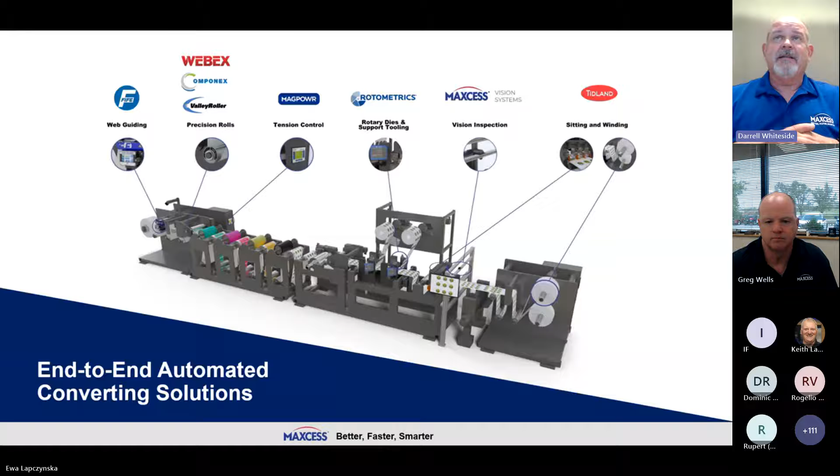So we're also continuing to invest in Industry 4.0 solutions. Well, what is Industry 4.0? Industry 4.0 is the Internet of Things, and it's having the ability to tie all of your different processes together, to collect data and to control those things centrally, since they are all tied together by the web. When I say web, I mean the actual web that you're running your process on. What this gives you is the ability to increase your productivity by being able to examine data from all of these different points and actually controlling them together.

It also eliminates human error, and it increases the quality and speed of your changeovers, because as we all know, if the web isn't moving, if your machine's not running, you're not making money. So Maxcess is dedicated to investing in this and continuing to expand our offerings that allow you to tie all of these product lines together. So in the end, our goal at Maxcess is to help you run better, faster, and smarter.

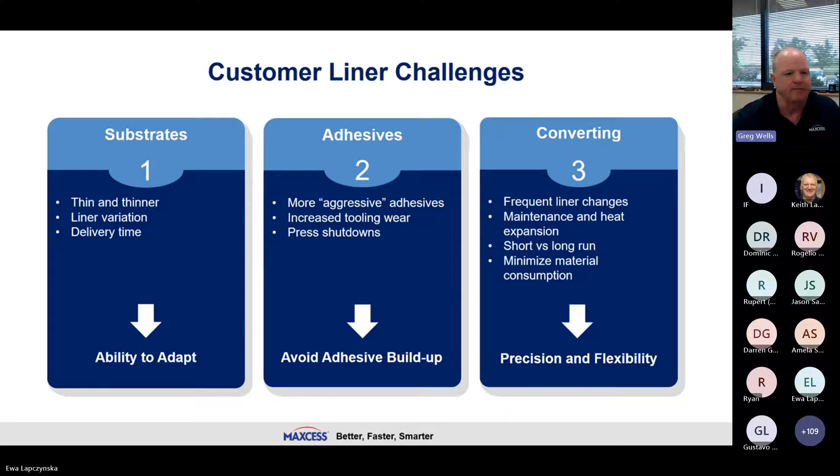The customer liner challenges today. So as we all know, the liners are getting thinner, the face stocks are getting thinner. We've been seeing a lot of variations in liners, and being able to adapt to these changes is very important. We offer adjustable anvils so that you can now change your clearance as the liners are changing. And with these thinner liners and thinner face stocks, the adhesives are changing. They need to be more aggressive because there's a thinner coat weight on them, on the thinner faces. So because of that, they're more aggressive.

And so you need to have a non-stick coating like our RotoRepel on the blades so that you don't have this adhesive buildup. This adhesive buildup will give you downtime while you're cleaning it off, but with RotoRepel non-stick coatings on the die, it makes it easy if it even sticks to the die. And converting this product then and being flexible to have these different products that we offer to mitigate these issues is very important, especially as you start to run thinner liners. Keeping the heat mitigation down as much as you can is very important. Next slide, please.

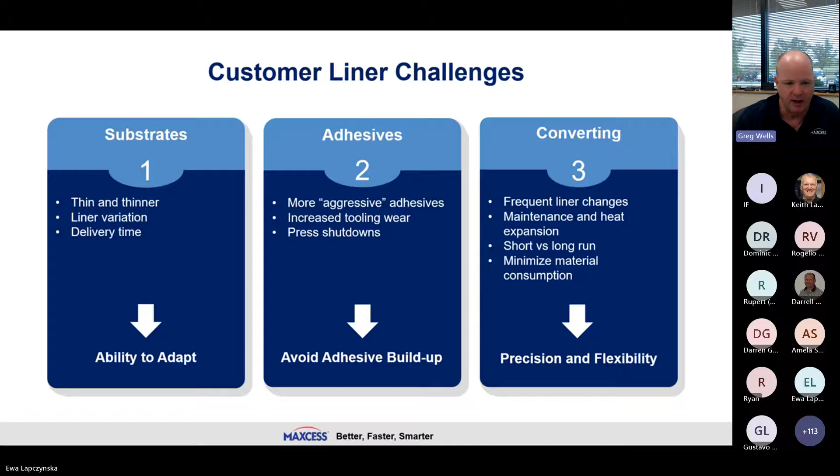The pressure that is being applied to these, making sure that you monitor and keep the pressure where it needs to be accurately. And one of my pet peeves is friction and temperature, making sure everything's lubricated and kept clean. Next slide.

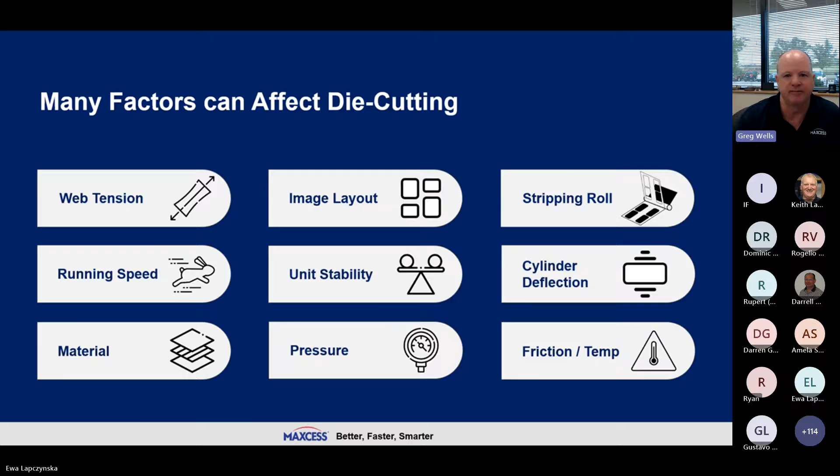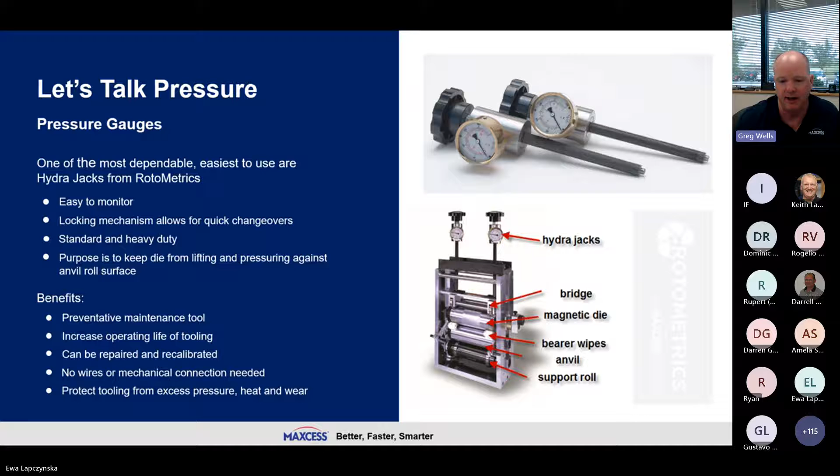So it's a great tool for just preventive maintenance to see what's going on. We can recalibrate them, send them back out. In fact, we recommend every couple of years to have them recalibrated. So it's a great tool to have, and I highly recommend using them. Next slide.

So with the Hydra Jacks, your cutting depth is very important. The accuracy on that cut depth is very important. When you're not cutting adequately, you could be cutting too deep, and then you can have delamination if it's a paper liner, or if it's a polyester liner, it may want to snap on you whenever the labels are being applied. So keeping the adequate pressure on there, and allowing the die to do the job that it is made to do, the cut to the right depth, is very important.

So some of the precision required in uncertain times. So the liners are changing. They're, I would say, better than they were 2 or 3 years ago. They've gotten better again. I think the shortage of liners was a big issue with the quality of the liner, but they are improving, but they are also getting thinner, and so the accuracy of this die needs to be

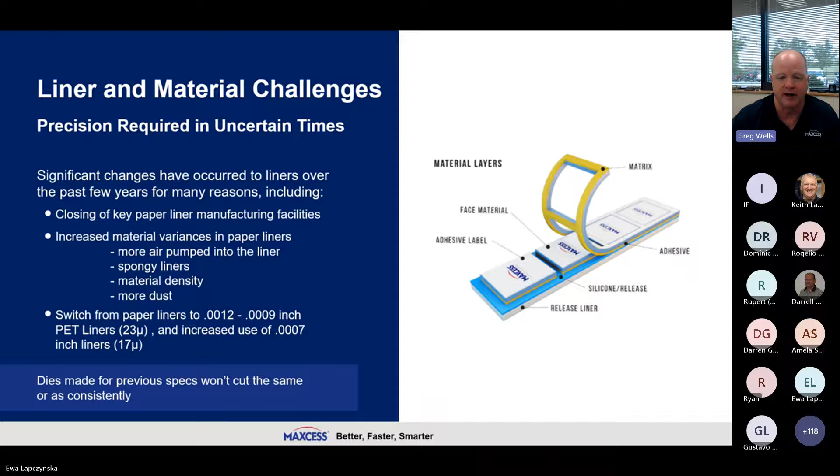And at that level of temperature change, you could lose as much as a tenth of a thousandth of an inch in clearance as those bearers warm up. That pulls that blade away a little more. On a solid anvil, the only thing you can do is just add more pressure, which creates more heat. So keeping things lubricated, clean and lubricated, is very important.

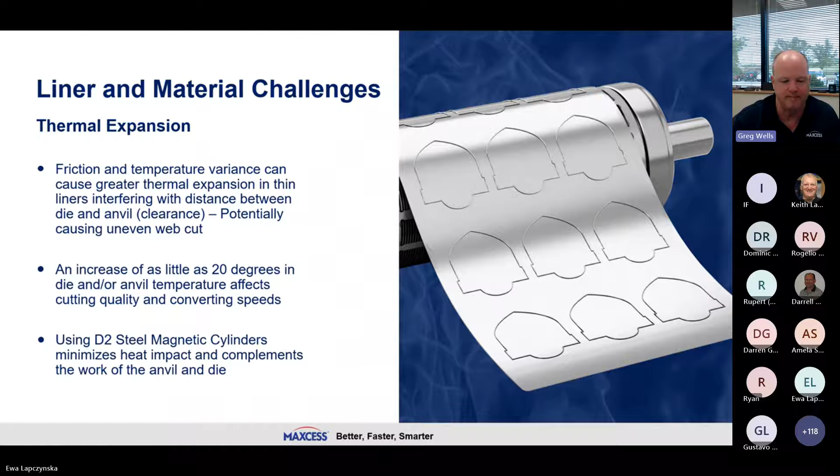So the die station and beyond. The older machines, it's inherent in them. They don't hold as tight of registration as they used to. And so there's a lot of this equipment out there still being used. We can put load cells in a press, a standalone, so that you can actually monitor that tension that you're getting. And that's very important because if you see changes during the run, I would expect registration issues, possibly die cutting issues because of that.

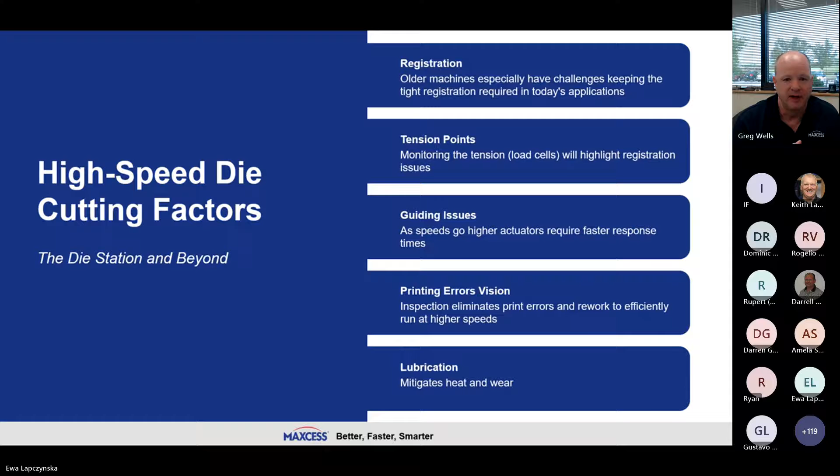Lubrication, I can't say enough about it, but I will say just keeping the felt wipers clean and oiled well is very important to the longevity of your dies. Next slide, please.

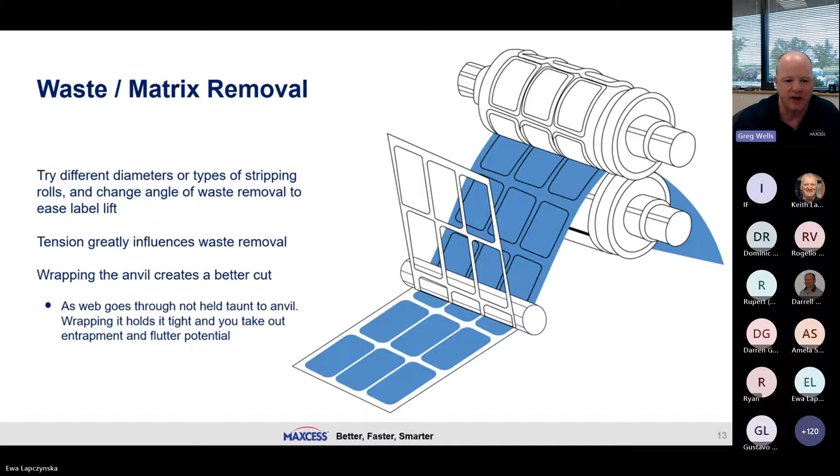Thank you, Greg. So now we're going to talk about tension control and how the tension in your web can impact your die cuts, or really any process you're trying to achieve. Tension control, unfortunately, is one of the most overlooked aspects of any web application, because if it works, you don't see it. You don't know it's there. You're not looking at a die cut, a guide moving something, or a coding process. But if everything's good, it's invisible, which is a good thing. For that reason, it's often overlooked.

As Greg mentioned, we're seeing thinner and thinner materials being used, and that's where tension control becomes more critical. In the old days, running 60-pound weight paper or board stock, you had a wide range of tension where everything's going to be fine, somewhere between breaking the web from too much tension or it going slack and bunching up or falling on the floor from not enough. So a machine designed to run heavier material is now trying to run extensible films, lightweight materials, very thin films that stretch easily. All of a sudden you're running into problems that didn't used to be there, typically because the machine wasn't designed to run those, and it's this invisible tension in the web causing the problem.

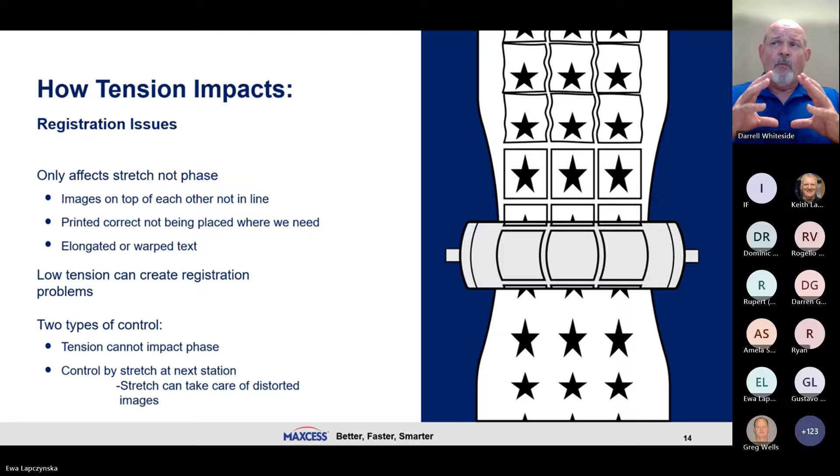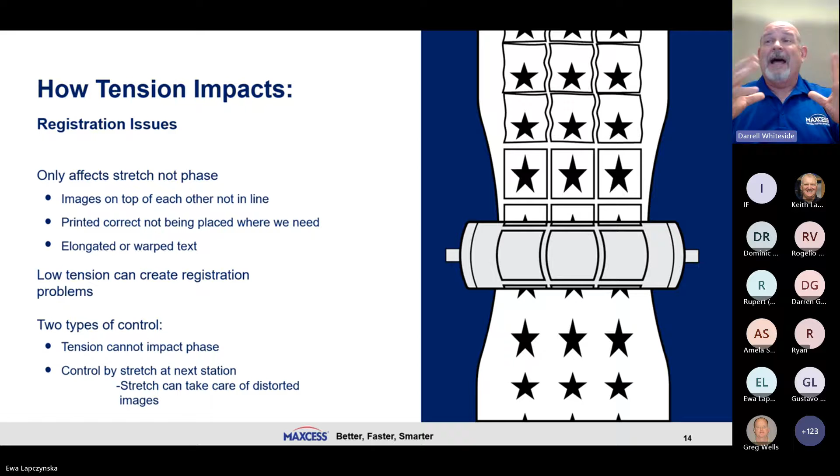What we see with tension issues in registration is basically stretch. We're talking about viscoelastic materials - not stretching to a yield point or beyond it. Where you run into trouble are materials that will stretch and then over time relax back to their original length or shape. In a die cutting situation, if we pre-stretch a material and it goes through the die stretched, and you die cut whatever shapes, then over time that relaxes back, you're going to end up with deformed shapes, not the die cut you were looking for. That's what we can control.

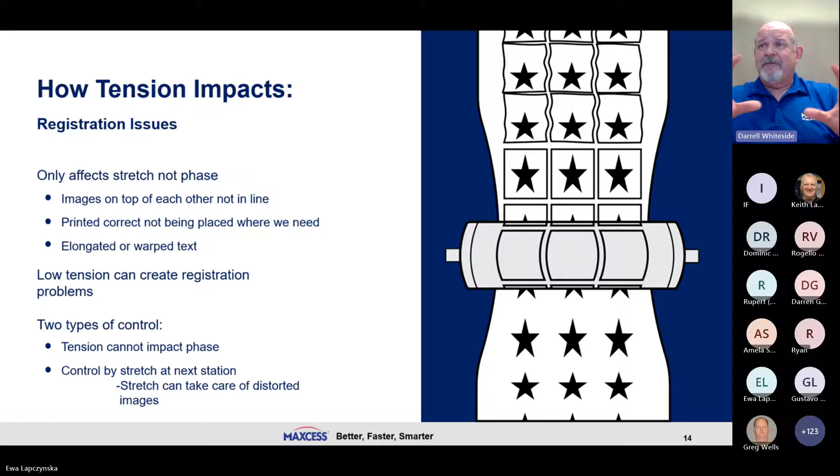Now, where do you control that? If you've got multiple die stations, you've got phase issues between them that you can't control - that's set by the dies themselves. But this typically starts at the unwind of the material. It can be pre-stretched at that point and stay stretched throughout the process until later it's used, or after it gets to the die and you've got these weird shapes showing up, like these stars at the top, due to the material being die cut while stretched, then relaxing back to its natural form. Most of this starts at the unwind of the material - that's where that initial stretch can take place.

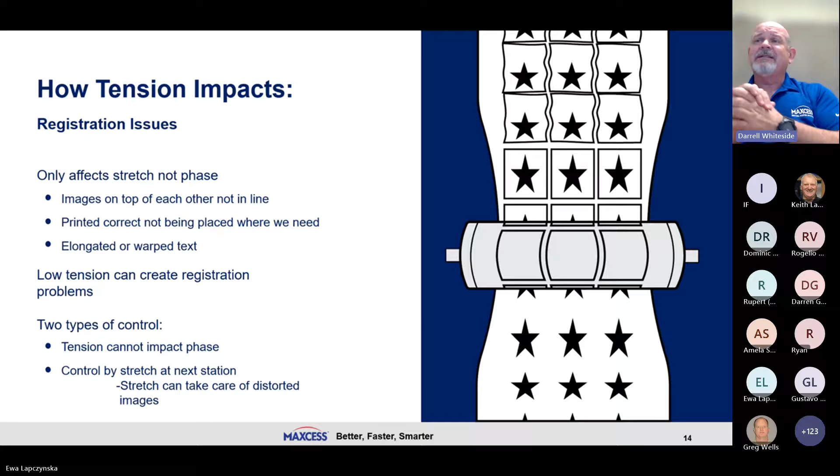So let's go to the next slide, Ewa. We're going to talk about three different categories or ways to do tension control to improve this or eliminate those issues. This applies to unwinds, rewinds, or even point-to-point processes in the middle. The tension in the web is directly related to the torque applied to a roll through a brake, clutch, or drive, and the radius or diameter of that roll.

The formula for it is tension equals the torque you apply divided by the radius of the roll. That's going to be the basis for what we're going to talk about here.

Let's start with the most basic type of system, a manual system. What's a manual system? It's still adjustable. You can increase or decrease the tension, increase or decrease that torque, but it's done manually.

This is an operator who's using his calibrated fingers, tapping on the web. 'Oh, I need more tension, I'm going to turn the knob up, or I need less tension, I'm going to turn the knob down.' In the case of an unwind or a rewind, that diameter is changing, so you need a babysitter there to constantly make that adjustment as it goes through.

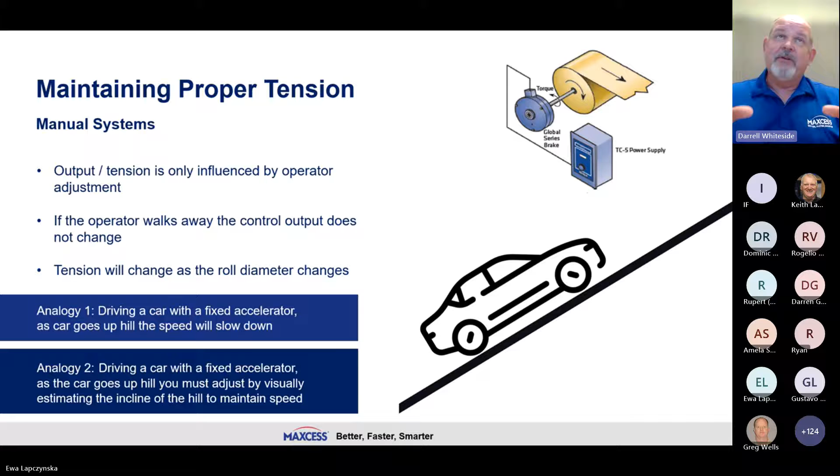So if we go to the next system, now we're going to get into the automatic type systems. Open loop is our first category. In an open loop system, you still have an operator who can set a set point for what he wants the tension to be. But what we're going to do is measure something that's going to be calculated as to how that tension is going to change, or how that torque is going to change as that radius changes.

Now it's open loop because in this case, what we typically do - there are different ways of doing it - but we would do an ultrasonic system to measure the diameter of the roll. So as the diameter of the roll changes, the output of the control to a brake, in the case of an unwind, would change proportional to that diameter. So this is not a PID loop system, this is just a proportional system where we're changing torque proportional to roll diameter.

So this would be like driving a car equipped with a sensor that detects a change in incline. It adjusts to keep the speed constant, but it's not measuring the speed of the vehicle. You could be driving your truck, you get to this hill, your truck has a sensor on it that detects the incline, so it knows to make an adjustment to try to keep the speed constant.

But what that sensor doesn't know, because it's only looking at the incline, is whether you're hauling a load of bricks in the back of your truck or if the truck's empty - it doesn't know how much load you have on it. All that it knows is the incline has changed. And that's all these systems know, is that the diameter has changed, and I'm going to change the torque proportional to that diameter.

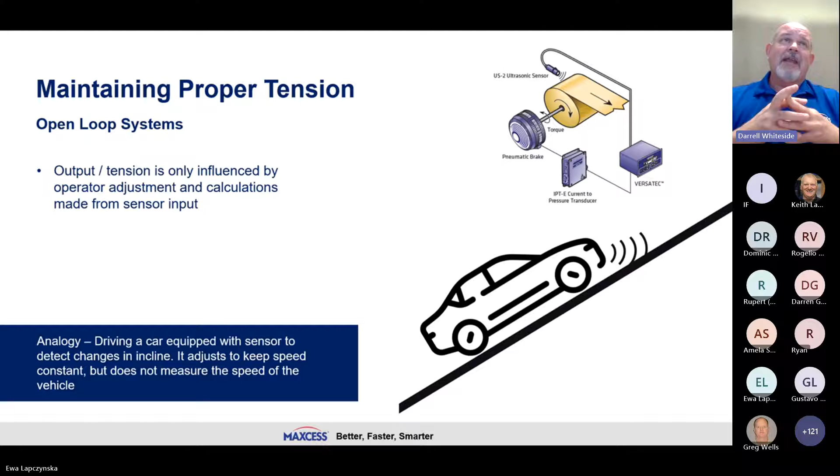Now, the next category of systems would be a closed loop system. Closed loop systems can come in different forms. What most people think about is our load cell systems, where you're actually using a load cell to measure the tension in the web. You're providing feedback to the control, and that's controlling the brake, which is controlling the torque. So you're getting direct tension control based off of the actual load that the load cells are seeing, or the tension that you've got in your web.

So in this analogy, this is like driving a car equipped with cruise control. It adjusts the acceleration based on the speedometer reading. This would be the highest end, or the most consistent, best way of controlling tension being fed into your system. Now, there are multiple ways of doing this.

There are different subcategories under closed loop. Most people think of load cell, and that is the most common type of closed loop tension control system.

Dancer arms are also very common in our industry. And what dancer systems do, they're a little bit different, and I could teach a whole day-long seminar just on dancers. I'm a big advocate for it if you need it. But dancer systems are position controls.

What a dancer system does is the loading on the arm is what sets the tension, and the purpose of the brake and the dancer in that case are to keep that arm from hitting the top stop or the bottom stop, to maintain the desired tension that you're looking for. So a little bit different.

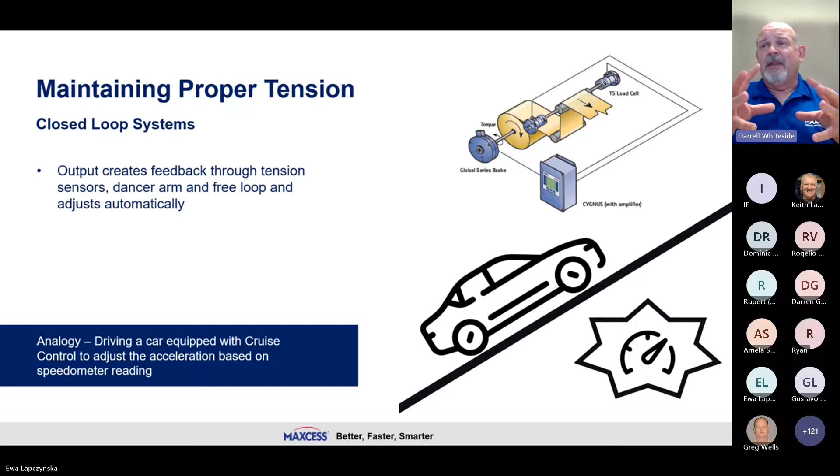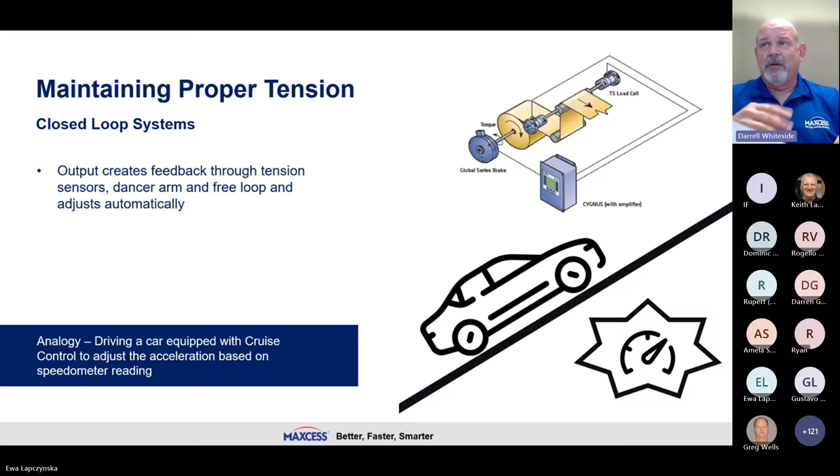Those are used when you need accumulation due to out of round rolls or indexings or things like that. So two very different systems. They both achieve the same purpose, but can both be very accurate and give you very good tension control throughout your process. So if we go to the next slide, Ewa.

So what I just talked about kind of goes for the unwind or the rewind. Now I want to talk about other things that can impact your process when you're die cutting, when you're printing, when you're doing anything. But specifically, what I talked about before with those three categories of systems applies to unwinds, rewinds, anywhere through the system. What I want to talk about now are your rewinds.

On the rewind end of the machine, basically when you're building a roll and rewinding the material, you're trying to make a good package. Your goal is to make a good package for the next unwind, so you have the best advantage to start off with that process to run smoothly. So we're trying to make a good roll and a good package.

Now, there's something very specific about rewinds that's very important to talk about. These are some common issues or common things that people see on rewinds.

Telescoping would be the first one, where you're actually getting the material squeezing out of the end. I'm sure you've all seen that, and you can see it in the example here. A lot of times we'll get calls on this and say, hey, I've got a guiding issue, I've got this telescoping roll. Typically, that's not a guiding issue. Typically, that's a tension issue.

What's happening there is we've got all of these inwound forces squeezing on that core. And if it's a slick material, if it's a film, if it's a coated paper, something with a very slick surface, then that can slide on itself. If you squeeze too hard on that core, you can literally squeeze the core out of the middle of the roll. And we're going to talk about that in the next slide, what that looks like and what causes that.

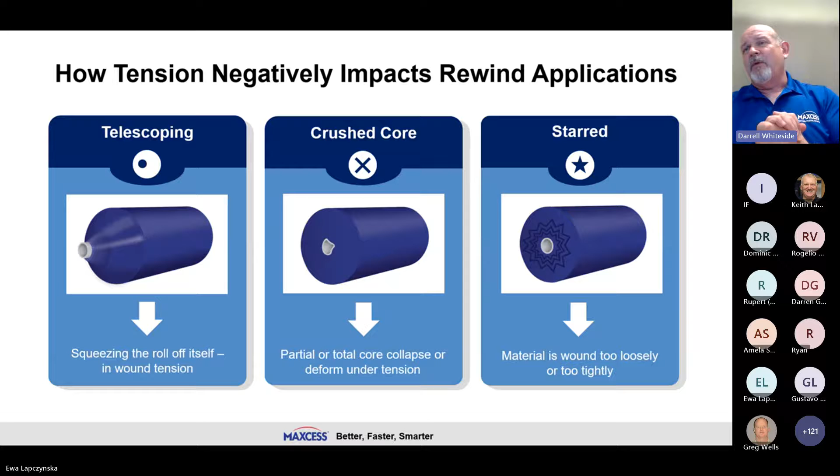How do we do this? So Ewa, if you go to the next slide. We do this by using something called taper tension, and most rewinds can benefit from using some amount of taper. If you imagine, with every layer that we put on that roll of material, if we've tensioned it, we've stretched it slightly, and every layer we put on there is squeezing harder and harder on that core.

So if you imagine taking a rubber band and you take it around your finger one time, it doesn't do a whole lot, right? But if you keep holding out a little bit of tension and keep wrapping that rubber band, the end of your finger turns the same color as this roll over here on the right. So that is telling you that that is squeezing harder and harder. And if you think about what that's doing to your finger, think about how much you're squeezing.

If you've got a roll of film or paper that's 3 feet in diameter, every layer on there is squeezing more and more. How many layers do you have on there? And every one is putting inward force on that core until that core cannot take it anymore, or until you get the telescoping. And the telescoping would be like if I took a wet bar of soap and squeezed it, am I just going to crush it? No, it's probably going to shoot up out of the end of my hand. And that's what telescoping is.

You're squeezing so hard, you haven't collapsed the core, but you're literally squeezing the core out of the middle of the material. So taper tension is a good thing. And what taper tension is, is actually the reduction of the tension set point as the roll builds. So I might start off my roll. I've got to have a good foundation. It's got to be a good firm foundation. Let's say I'm starting off at 20 pounds of tension in my web.

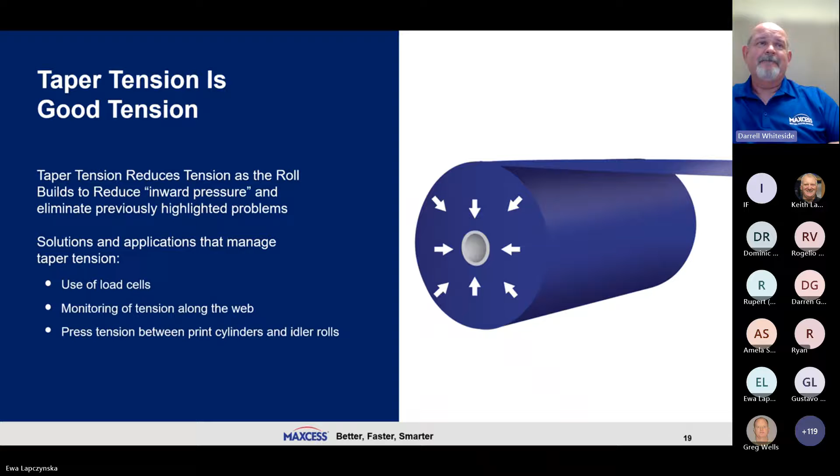But those are the three big indicators that tell you need taper tension. If you're having any issues on your rewinds that look anything like telescoping, crushed cores, or starring, sometimes you might see it as dishing on the face of the material. That could be an indication of it as well. I've even seen it with materials with adhesive on it where they're squeezing the adhesive out of the end of the roll and the middle part of it's dry because all the adhesive's been squeezed out. Those are all indications that you need that very important thing called taper tension. Okay. So that would be on the rewind end of the machine.

Okay, thank you, Darrell. As I mentioned earlier, the use of changing the diameter of your stripping idler is very important. You need to be able to adapt to the label length. If you're doing a small label, you can't just use a 3-inch diameter idler, or else that matrix is not going to dispense that label out. It's going to want to go up with it. So going to a smaller idler or a bullnose bar, straight bar with a rounded edge to help push that label out, dispense that label out.

It's very important. The same goes as you go to a larger label repeat. You don't want a small idler in place. You want a larger idler in place. And then I think it also goes right back to you, Darrell.

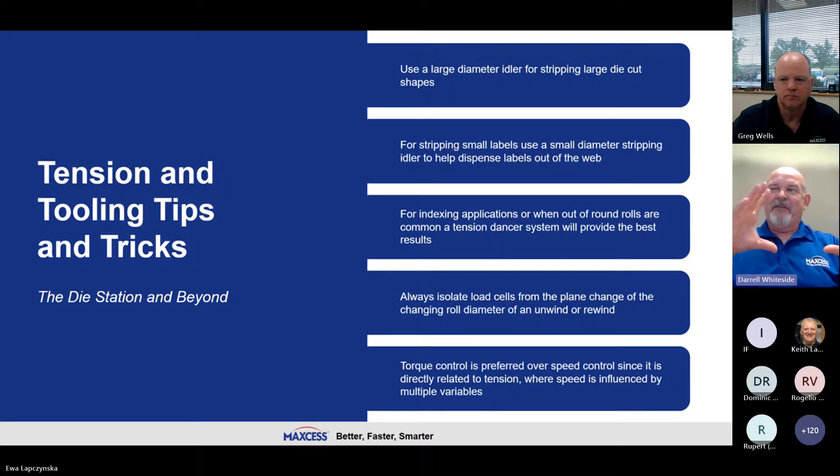Meaning, if I have the roll of material and the next idler after it is my load cell, as that roll diameter changes, it's going to change the plane that that load cell sees, and it's going to change the direction of force that that load cell is seeing. And it's not going to be an accurate load cell reading.

So basically, what you want to do is make sure you have at least one roll between the unwind or rewind and where you put a load cell, because you want to keep the wrap angle fixed. You don't want the wrap angle to ever change on a load cell.

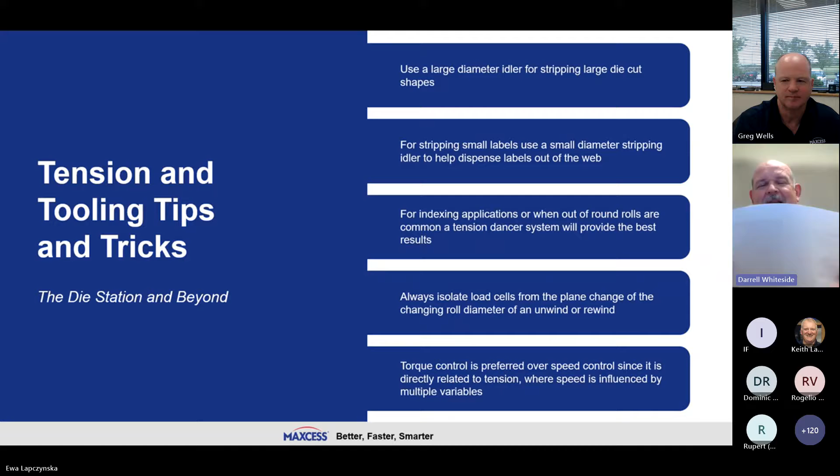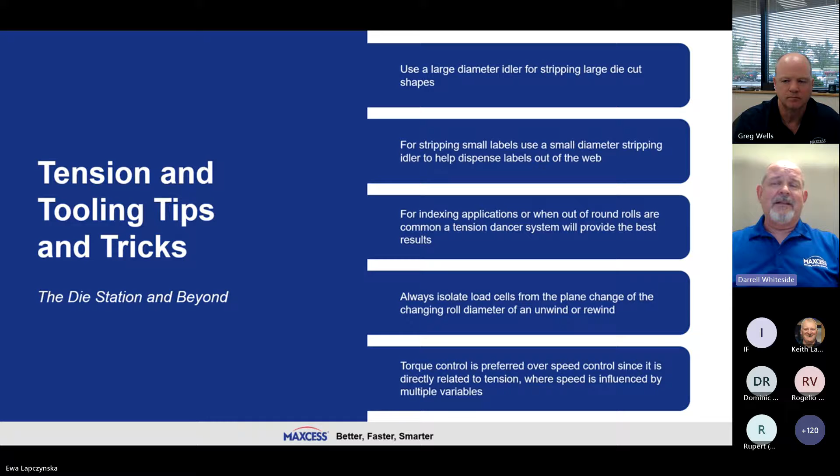The next thing, which is probably a can of worms and a whole other presentation, but it is very important, I think, to address. A lot of people do speed control, which you can do for tension control. Basically, it's called draw instead of tension. I turn this roll faster than this roll, and that puts draw on the material, and that tensions the web. You can do that, but the preferred method is to do it through a torque device, whether that's a clutch or a brake or even a torque drive.

That's the preferred method. And the reason for that, I mentioned earlier that tension is a function of the torque divided by the radius of the roll. Those are absolutely proportional, so they're directly related. Changing the torque based off the radius is going to give you a tension. Speed and tension are not.

So any small variations you have in a speed control, so even if your roll's not completely round and has a lump in it, that's going to create a speed variation. Small changes in speed will result in large changes in tension because speed and tension are not directly related. So torque control is always going to be the preferred method from any reputable tension control supplier. They're going to tell you that. Torque control is always going to be the preferred method for tension control.

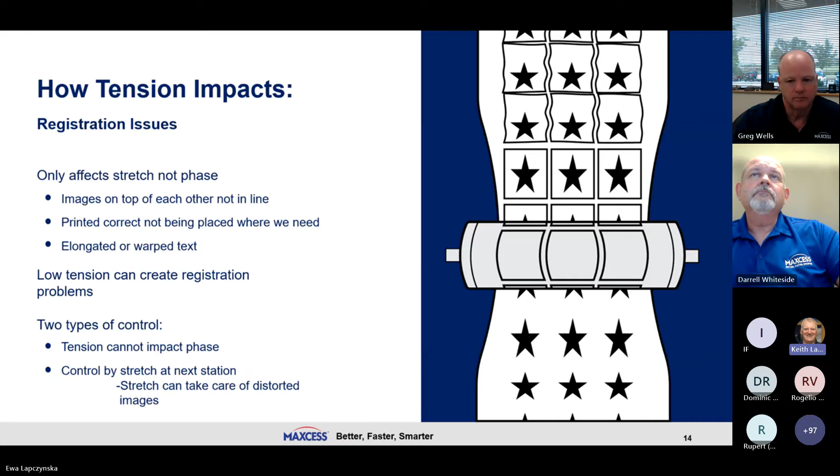Okay, and most people do auto applied labels. This label is going to go to an applicator, whether it's high speed or just to the applicator, so that you can apply the label to the product. If you're cutting too deep into that liner, what'll happen on the cross blades, especially, the lineals really don't matter as much, but the cross blade, if you cut too deep into it, for one, you can force adhesive down into that liner, and now the label is going to want to follow it.

It also bends differently when it's being applied. That label wants to follow through with the liner, not dispense out, if you're cutting too deep. So you just want to cut to the silicone. Ink stains, very important, doing an ink stain. I know that the film liners, we can't do ink stains on them. It doesn't do any good. Actually, with the film liner, a lot of people do the snap test. There's strain tests to see if you're cutting too deep.

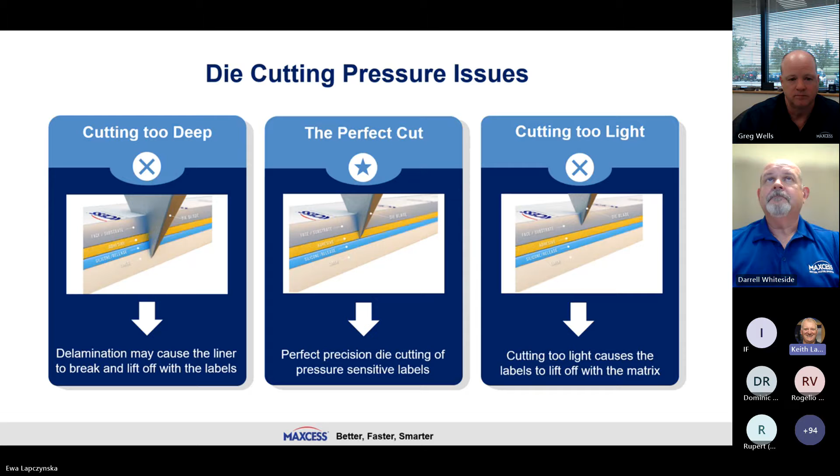Darrell, let's kick this to you. What's the best way to know if you have the right amount of tension? We often see that if we move the tension on our machine, the material doesn't collect evenly. So every process is different. We are tension control experts, but we don't typically tell people what tension to run on their process.

Typically, the customer tells us they want to get to this, and we size everything and get them the right products to get to a specific tension. Now, I'm not sure I understand again what exactly they're saying. It collects differently. I'm not sure what that means exactly, or whether that would tell me they would need more or less tension to solve that problem.

So it's very difficult. Again, we don't tell people what tension to run. We can help you get to what you want to run, or we can help you based off of what you're seeing, tell you, okay, maybe you need more or less, but I'm not really sure I understand that question.